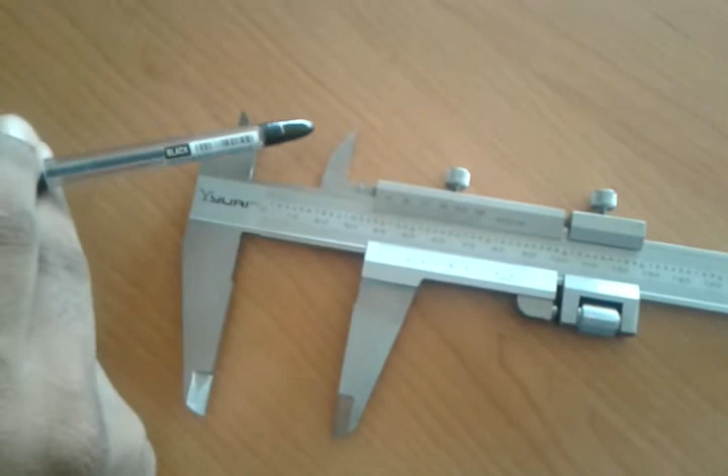The vernier caliper essentially consists of two steel rules, and these can slide along each other. The parts of the vernier caliper are shown here. These are called the outside jaws, used to measure external diameter or width of an object. These are the inside jaws, used to measure internal diameter of the object.

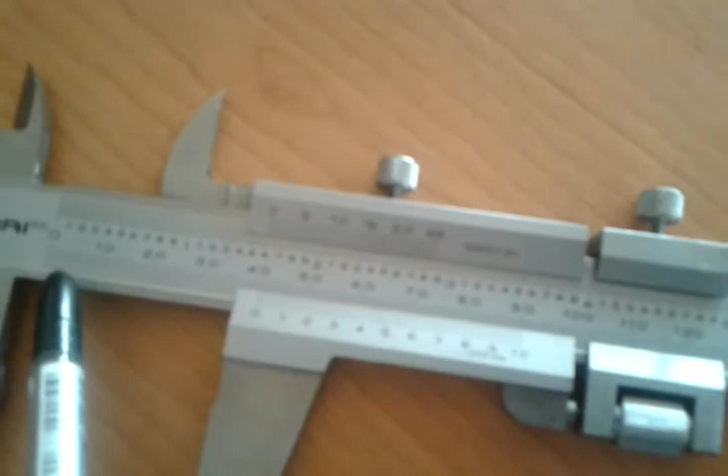This is the depth probe used to measure depth of an object or the hole or internal diameter of the hole. Then this is the main scale, on which reading is up to 1 decimal place, that is in centimeter, from 0 to 300 is the capacity of this instrument.

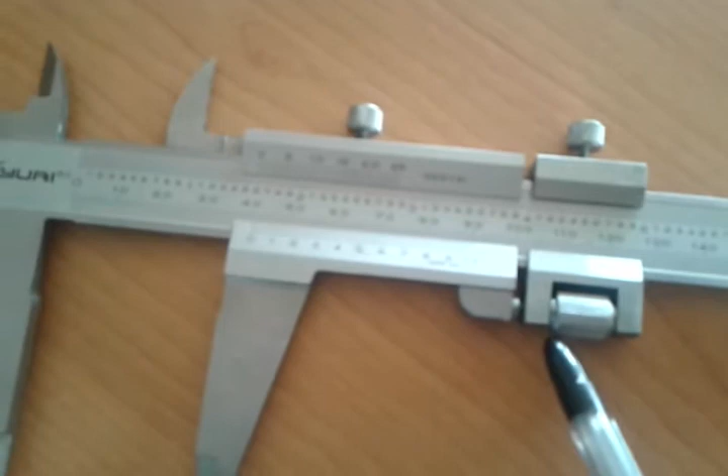Then the vernier scale, this is the secondary type of scale which is used, and this is the fine adjustment scale. Again, these two screws are used for the fixation of the jaws, and this is an adjusting screw which is used while calculating. Now let us know what is the least count of the vernier caliper.

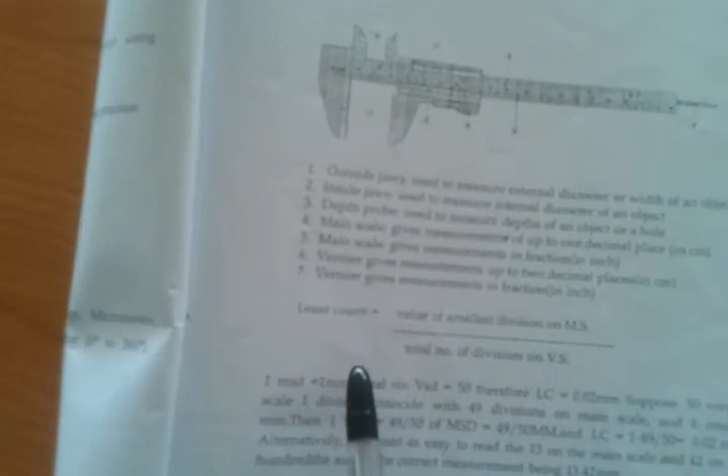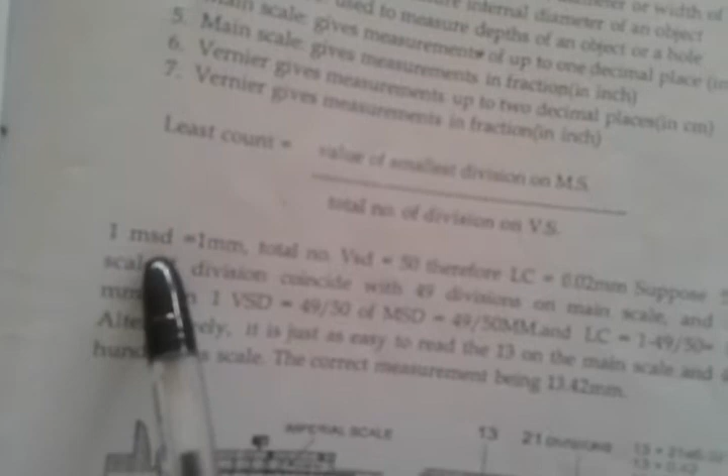Least count is given by the formula value of smallest division on main scale divided by total number of divisions on vernier scale. Suppose one main scale division is equal to 1 mm, and total number of vernier scale divisions is equal to 50. Therefore least count becomes 1 divided by 50, that is 0.02 mm.

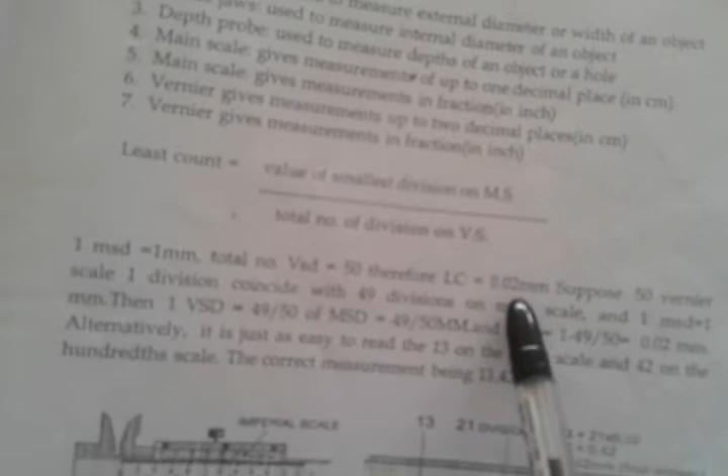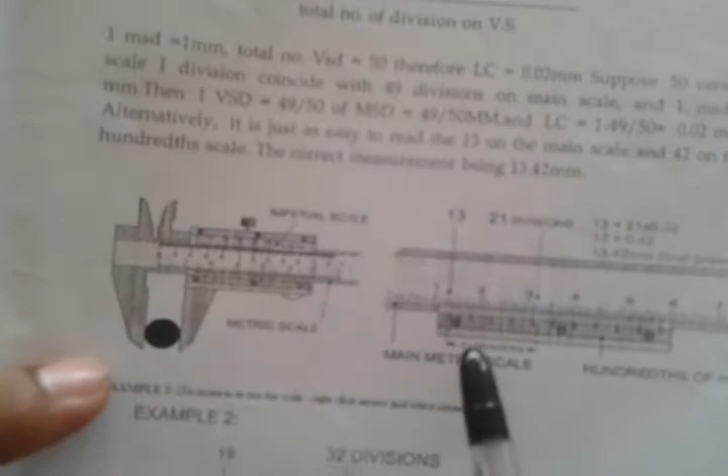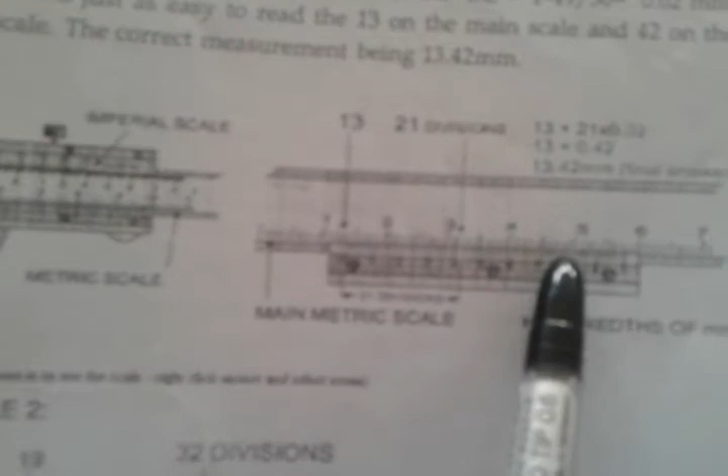Let us take an example. In a 50 division vernier scale, the divisions coincide with 49 divisions on the main scale, and 1 main scale division is equal to 1 mm. Then 1 vernier scale division is equal to 49 divided by 50 of main scale division, and least count is equal to 1 minus 49 divided by 50, which is equal to 0.02 mm.

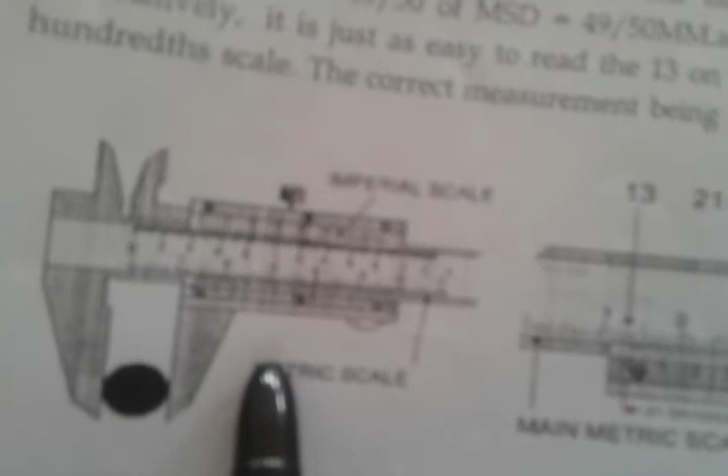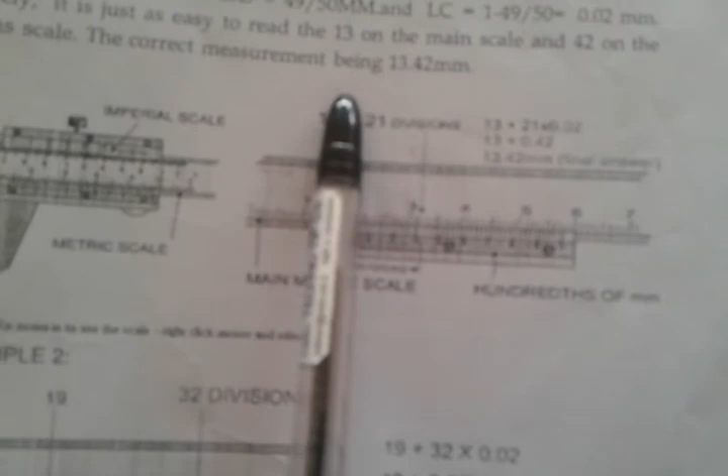Alternatively, it is easy to read 13 on the main scale and 42 on the hundredths scale. The correct measurement will be 13.42 mm. In this way, we can conclude that the reading measured was 13.42 mm.

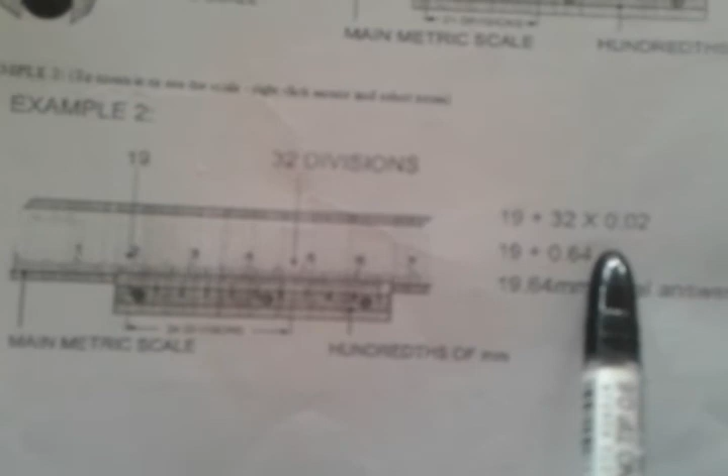Let us take another example in which the 19th line is getting coincided with the 0 of the vernier scale, but there are total 32 divisions matching on the scale. Therefore calculation will be 19 plus 32 into 0.02, that is the least count of the vernier scale. Therefore the equation becomes 19 plus 0.64 is equal to 19.64 mm.

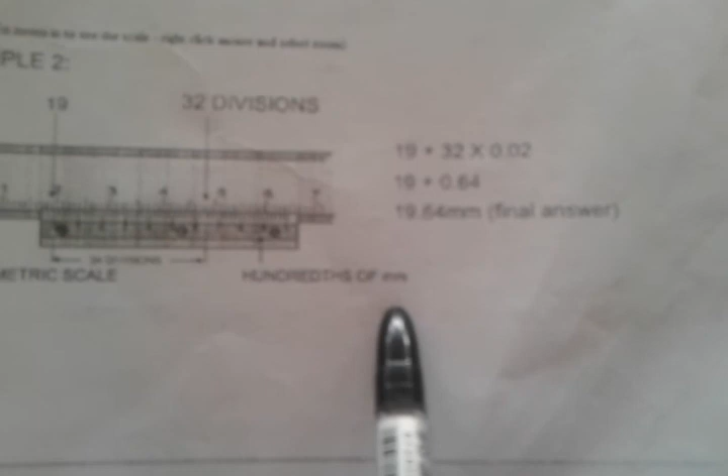That is the final answer, or you can say the reading taken by the vernier caliper on the scale. In this way we can calculate readings with the vernier caliper.